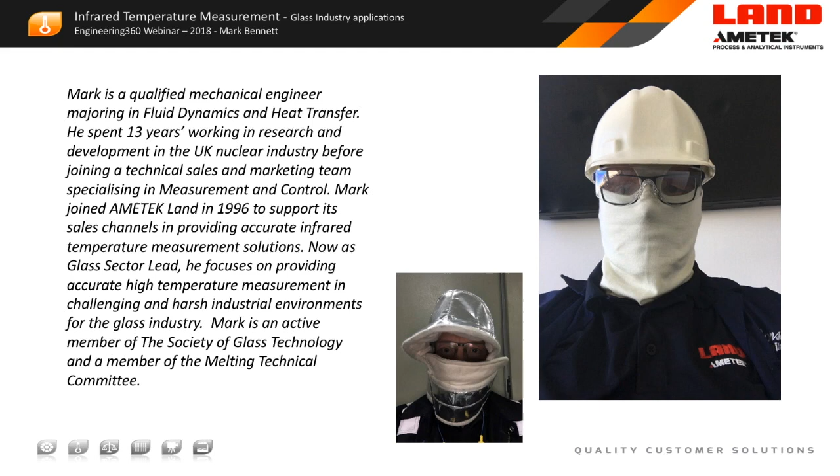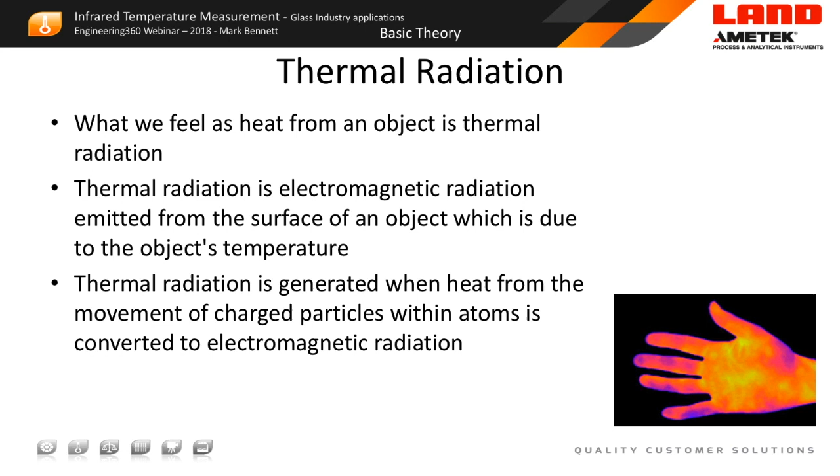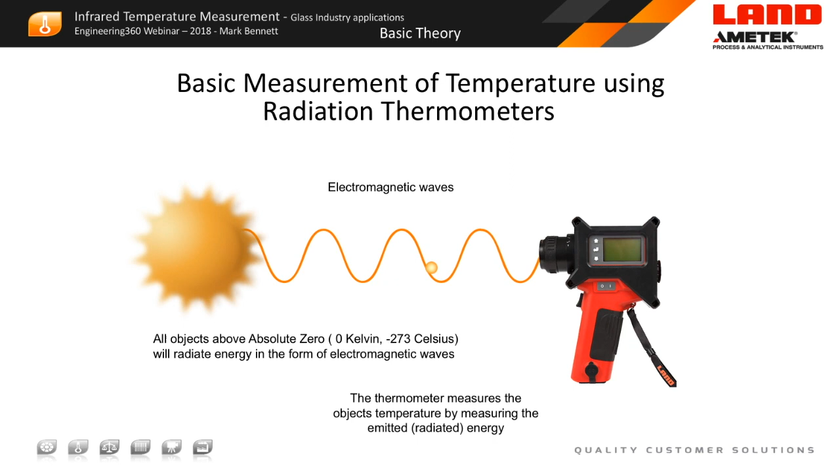Before we get to look at some of the applications in the glass industry, what I'd like to do is cover some of the basic theory and what we are looking to measure with thermal radiation. For some of you, this is a new subject, something you're not familiar with. But thermal radiation is something that we all are familiar with. It's something that we can feel. It's the radiation we feel coming from a radiator or from a hot fire. What we need to think about is that all objects, everything above absolute zero, is emitting electromagnetic energy waves that we can make use of if we capture them and relate that signal to an output.

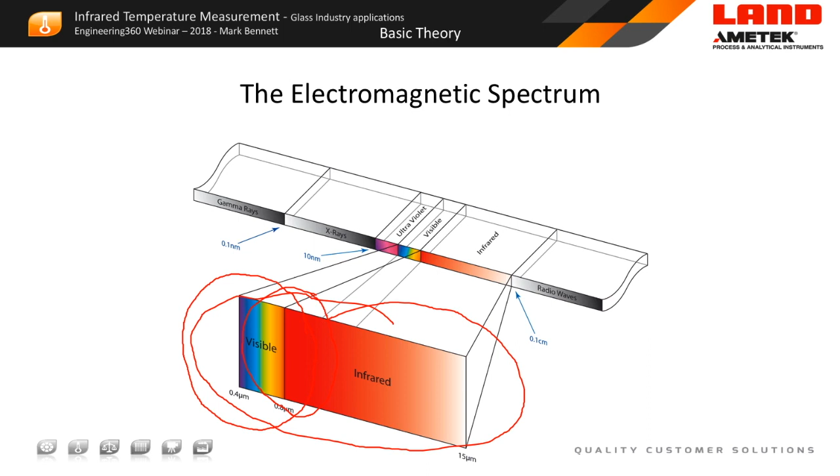When we look at the electromagnetic spectrum, it's something that we're all reasonably familiar with in our day-to-day lives, with X-rays, the visible light spectrum, and radio waves all covering the electromagnetic spectrum. The section I'm particularly interested in is the infrared section. What you notice is that the infrared section also covers the visible section, so our eyes are actually very good infrared detectors. If you think about looking at a piece of steel heating up, it changes from its natural colour to appear red to the eyes, because it starts emitting energy in the region our eyes see as red light. As the object gets hotter, it starts emitting orange, and eventually we call it white hot because it's emitting energy over all the wavelengths our eyes can see. Traditional incandescent light bulbs have a tungsten filament, which is heated until it is glowing white hot, and that's what our eyes see as visible light—it's emitting energy over the area that our eyes are sensitive to.

This actually shows us quite a great deal of how we use infrared thermometers out there in the field. We can use our eyes for making certain judgments, and we'll look at that later in the webinar. So the first thing to understand is, how do we measure infrared energy? How is that measured by a thermometer, by a device that gives us something we can relate to temperature?

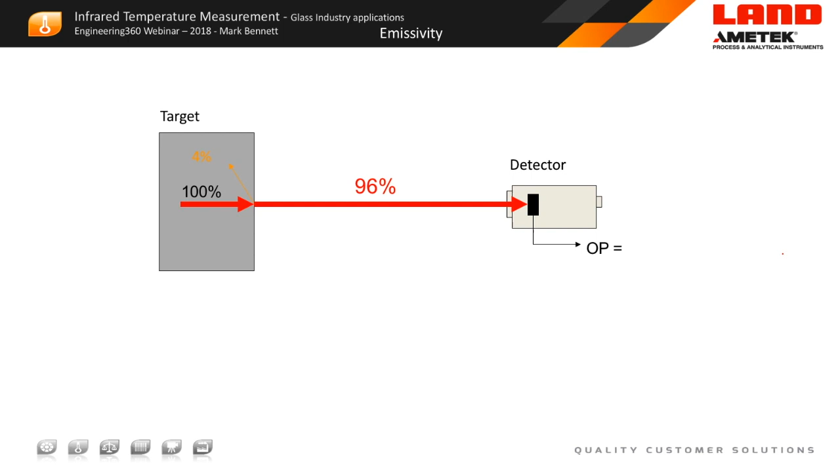If we are to relate that 96% of energy that our detector receives back to temperature, we need to calibrate the device somehow. The way we do that is to take the instrument to a calibration laboratory, which has a device called a black body furnace.

A black body emits total radiation - that's 100% of radiation over all temperatures at all wavelengths. That's quite critical, all temperatures and all wavelengths. What we do is relate the output from our detector to equal some function of temperature.

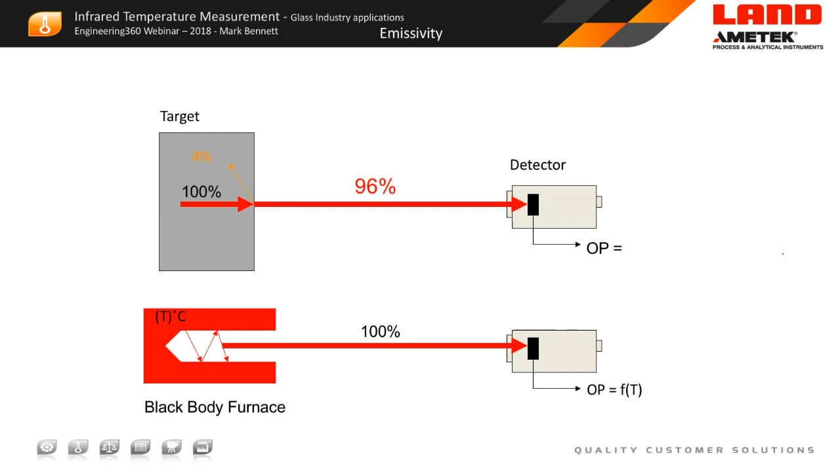What we need to recognize is that the emissivity value, which is a ratio value, is the radiation emitted by an object at temperature divided by the radiation emitted by a black body at the same temperature. This term, emissivity, is actually a factor which relates the real world back to our calibration laboratory.

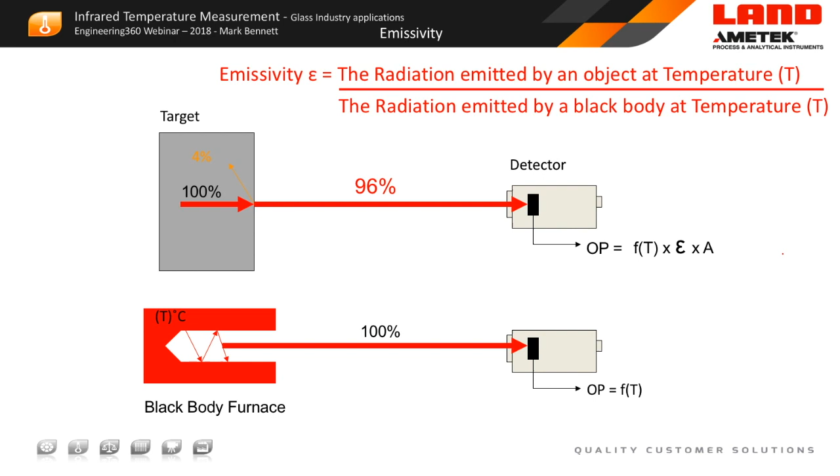The output from our detector then becomes equal to some function of temperature times this emissivity factor times the area over which the measurement is made. So if we look at that as an equation: output equals some function of temperature times emissivity times area.

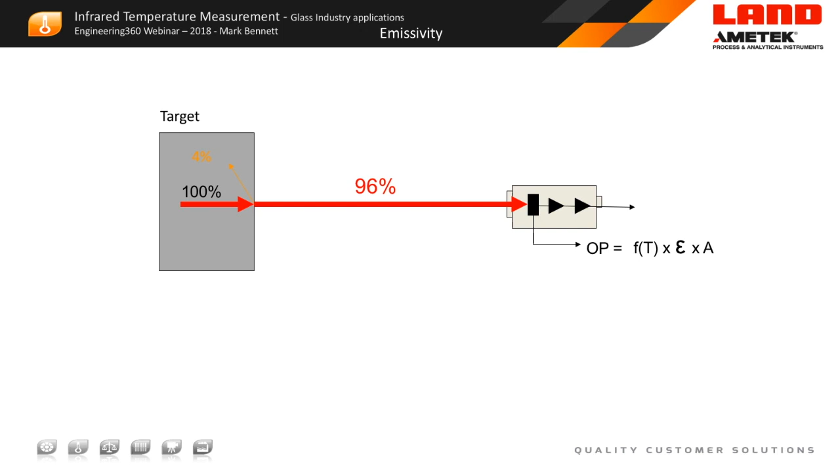Let's look at our example here where we have 96% of the energy coming to our detector. What we need to remember is our emissivity relationship, which we've calculated either from reference tables for emissivity, or from a known factor coming from evaluation, from history, or indeed Land can provide an analysis of emissivity for your specific material.

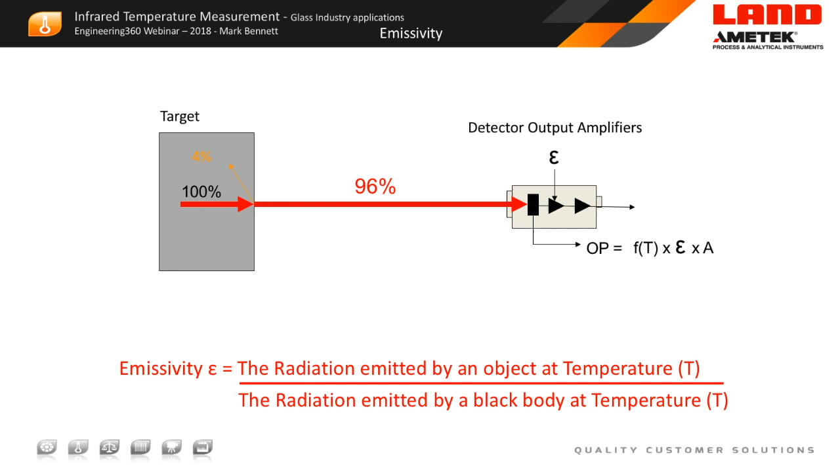What's important to recognize is that the emissivity is applied to the nonlinear detector output. What we do is divide that output by the factor of emissivity, which in this case is 0.96. So the example here uses an emissivity factor of 0.96.

That means the output from this amplifier is being effectively divided by this 0.96 factor, so we add artificially 4% of the signal. Then within the thermometer itself, we apply a linearizer, which gives us a 4 to 20 milliamp output from the thermometer.

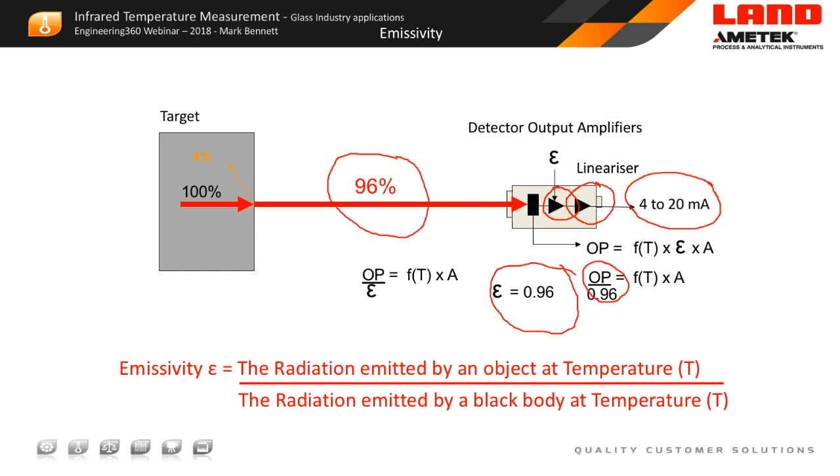So what are we here to look at today? We're looking at the glass sector. Glass is quite a phenomenal material - if you look around, glass is actually everywhere. It's in the vessels that we drink from, the windows we use to look out into the world, the windscreen of our cars, and even in the spectacles that we wear for seeing. Glass is a very, very important material.

Some of you might not realize, but the materials we use for strengthening are often fibre. The glass fibres we produce, high strength glass fibres, are used for example in strengthening the blades of windmills, and indeed in my own vehicle, the aluminium cylinder head block has reinforced glass fibre in it to give the block strength.

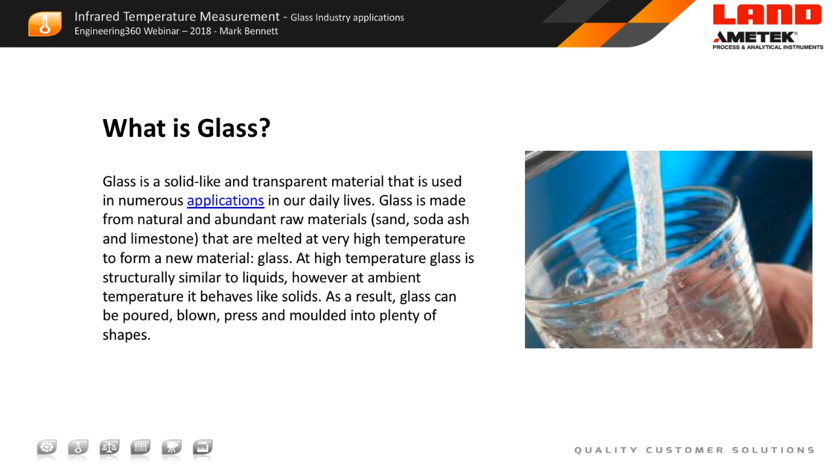So glass is almost everywhere, and it is the ultimate recyclable material because we can reheat, remelt, and reuse glass. In our current global concerns about the environment, glass is a very important material going forward. It's something we need to look at and improve the material science around, because we've been making glass pretty much the same way since Roman days. There's a lot of work to be done improving the production of glass and how we move that forward in terms of efficiency of production.

So what exactly is glass? Well, believe it or not, the basic form of glass is liquid sand.

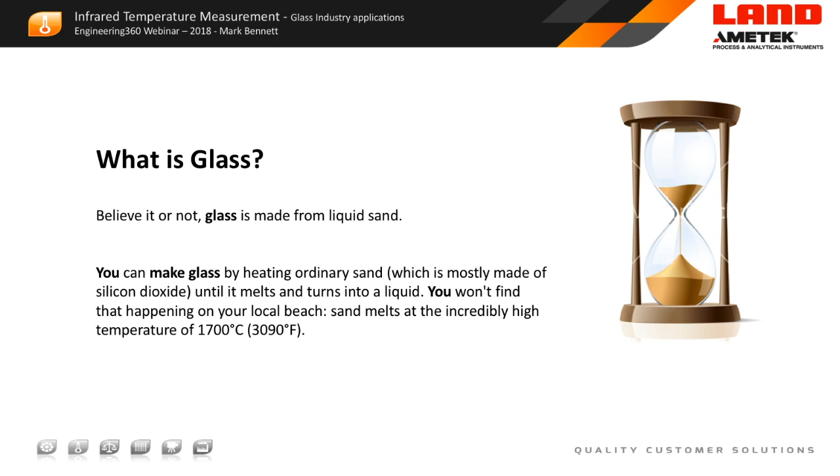So what we're doing is we're taking sand, which forms the vast majority of what's known as the batch. The batch is what's put into a big melting furnace, and we heat that up to temperatures of around 1700°C, 3090°F, and from that the batch forms or dissolves into what becomes molten or fluid glass.

There are many different compositions of this batch, the base raw material, that form lots of different glass types. There are some examples shown on the screen now, just from Wikipedia, but they give you a good understanding of the main glasses we would use.

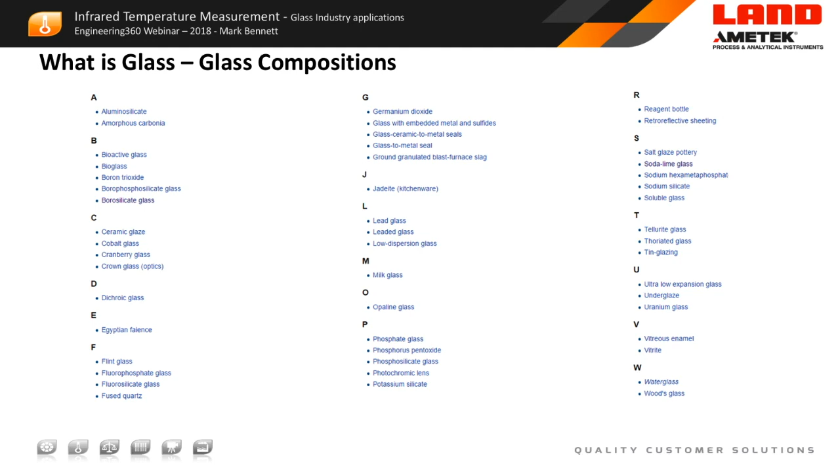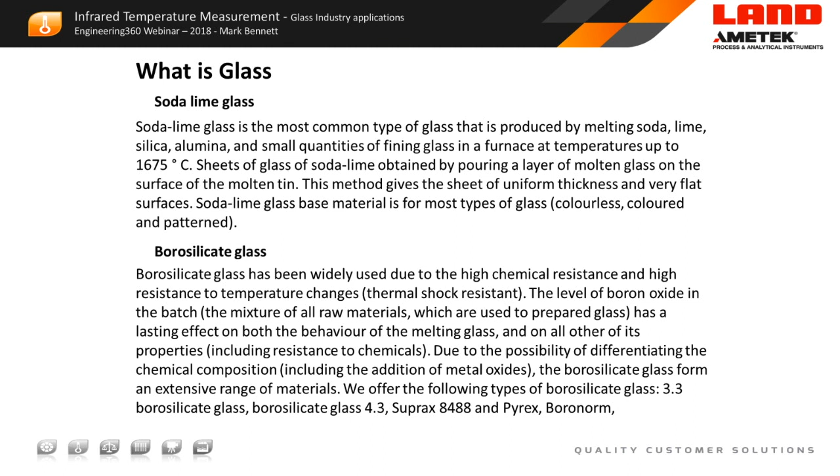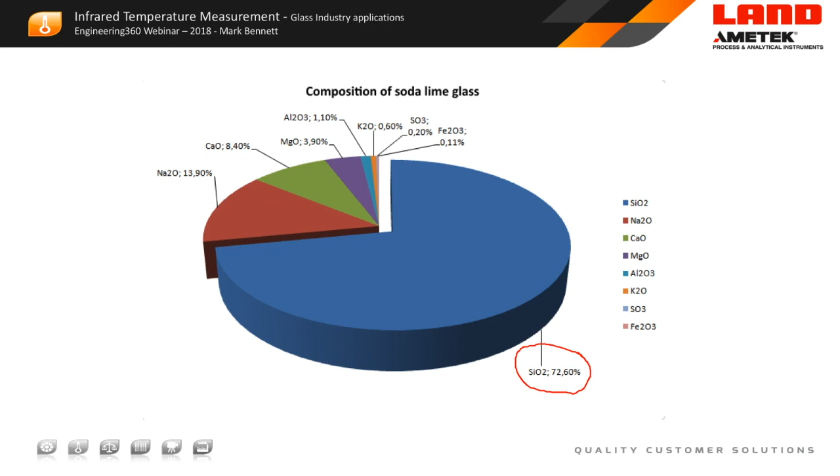Predominantly the biggest glass that we have in the system is soda lime glass, and then we also have borosilicate glasses, which are the higher chemical resistance glasses used. I've highlighted those two as examples. If we look at soda lime glass, predominantly the largest component is the sand, the silica. But there are a number of other component parts that make up the batch, some for forming specific types of glass, whether a different color, strength, or properties, and that's where the batch is made from.

There are also some additives which help with the melting, the dissolving of the glass, by forming a wetting process around the materials. It allows them to dissolve into the process more readily.

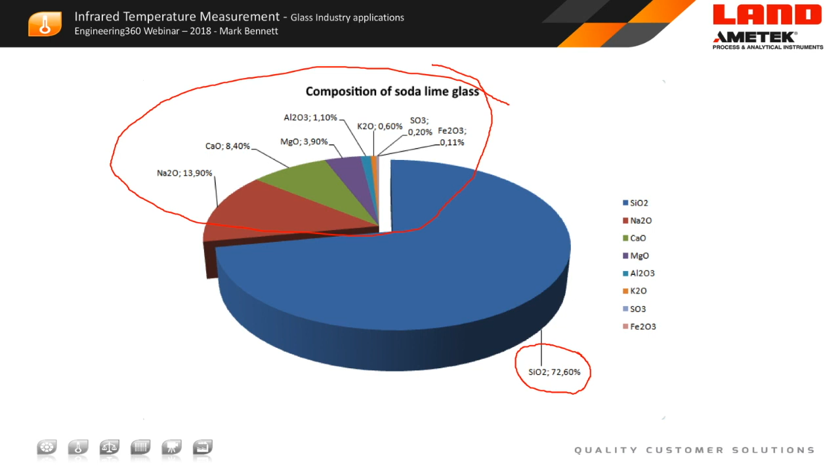So let's start the application part of this webinar, looking at the start of the process, which is the melting of the sand. The melting of the sand occurs in what is known as the glass tank, which is heated somewhere in the region of between probably 16 to 1700 degrees centigrade.

Every 20 minutes there is something called a reversal. During the reversal time, the flame is extinguished and the reversal of the flames occurs. We do that because the waste gas is taken into the regenerator, where energy is effectively stored, and thus can be brought back into the process without wasting the energy.

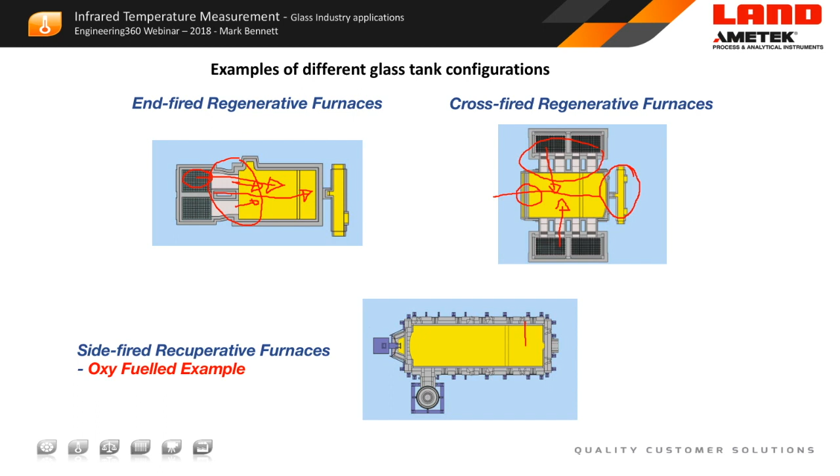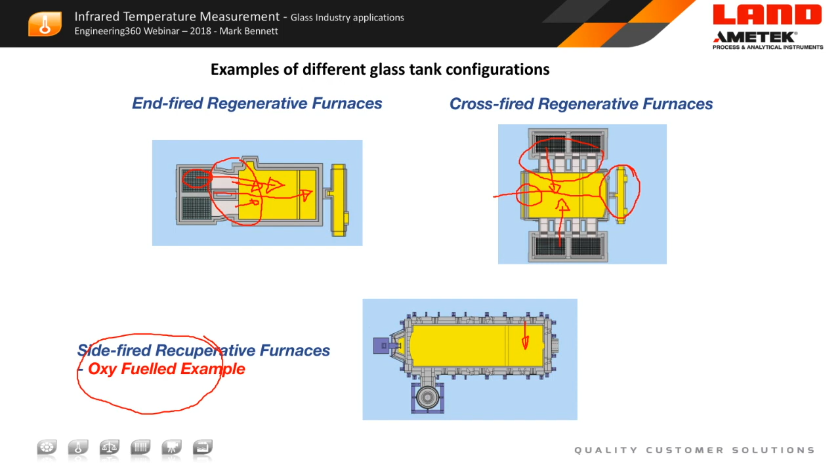The modern new design of tank is what's called a recuperative furnace. In this furnace, the flames run continuously, but they are what is known as oxy-fueled furnaces. With an oxy-fueled furnace, we burn the fuel using pure oxygen, and this reduces the NOx values within the exhaust gases, and again is a green solution for our planet.

To drive these thermosiphons under the surface, the primary goal is to create a temperature profile along the crown of the furnace and along the side walls of the furnace. The key element here is to create what's called the hot spot, which occurs above the spring zone.

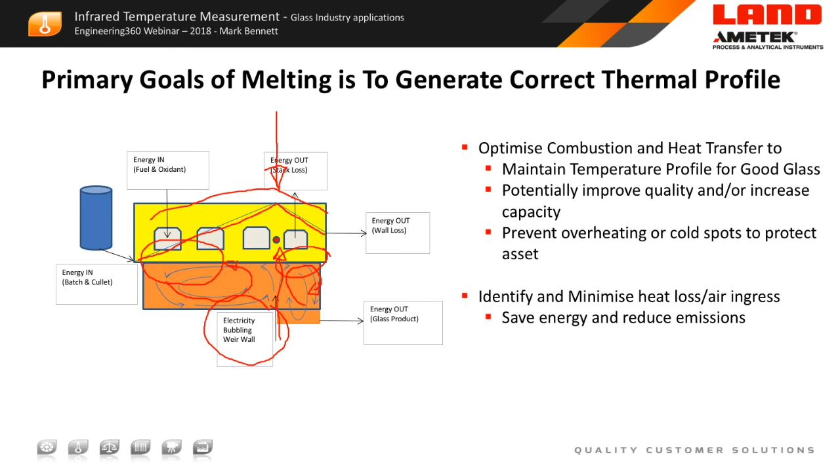As you can well imagine, temperature control, temperature monitoring, and flame management are very important within this environment. Traditionally, and if you go to most glass plants everywhere in the world, the Cyclops Portable has become the industry standard for monitoring temperatures and temperature stability within a glass tank.

You'll find that almost every glass company in the world shoots a single point using the Cyclops 100L, the 2F version, which has integral eye filters designed for use in very hot environments, particularly in glass tanks, because if you look into a glass tank without protection, you will damage your eyes. The Cyclops allows us to take an accurate temperature measurement from a reasonable distance at a very precise location. This has through-the-lens optics, very similar to a camera. In fact, the original lens on the front of this device was designed by the Minolta camera company, to give you an idea of the quality of optics and why this instrument is used as standard.

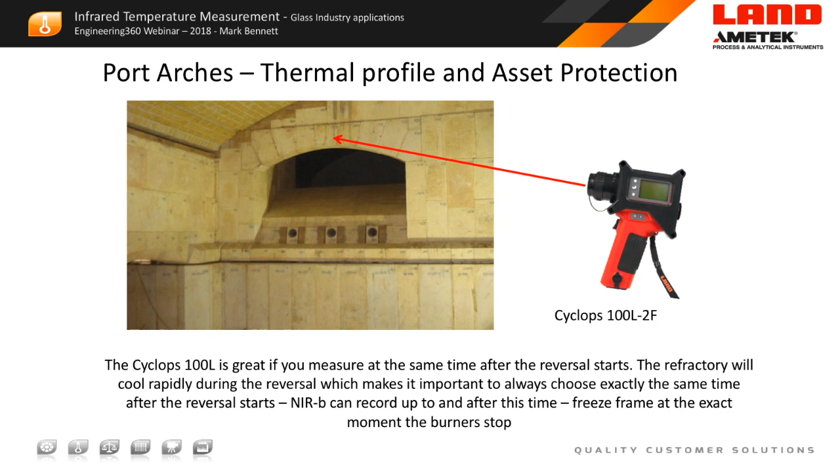So once a shift, at least, a single point measurement will be made to check the overall temperature and compare it with the glass tank on a trending basis. This is to compare with the blind thermocouples mounted in the crown and along the breast walls of the tank. Of course, blind thermocouples are not measuring true temperatures. So the Cyclops is used to make a measurement during the reversal cycle at a precise point when the flames are out for a given length of time.

Now, what you can imagine is that making a temperature measurement with a Cyclops takes time. The optical profile, as we've discussed in the previous slide, is monitored by taking several point measurements along the walls of the tank to look at the shape of the optical profile. To take an optical profile using a Cyclops unit can take several hours.

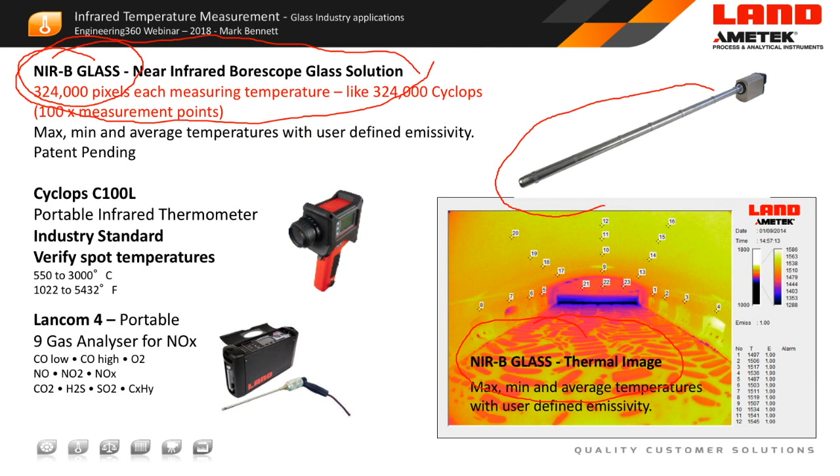However, what you can see here is the NIRB glass true thermal imager for monitoring temperatures within the glass tank. This is a thermal imaging device which looks along a lens system such that the actual thermometer, the detector, the important part, can be stabilized outside the glass tank to give accurate and stable measurements continuously inside. As you can see here, you can actually measure at any location continuously, either along the walls or anywhere on the refractory. This allows you to capture very precisely the temperature in the tank at a given time during the flame-out, between the reversal when the flame is not present.

We still use the trusted Cyclops as a cross-check, because the operators looking inside the glass tank and making these measurements is a very important part of the general process, just to monitor the condition of the glass tank. So we're complementing the use of the Cyclops with these new continuous temperature monitoring devices, which give us 324,000 pixels. Each of those measurement points is replicating what you see with the Cyclops portable.

The important thing to recognize is the reason the Cyclops works so well is that the filters in the Cyclops filter out the combustion gas from the measurement. There is no effect from the combustion gas on your measurement. It also measures from a very, very small area. The Land thermal camera measures at the same wavelength precisely, using the same filters as the Cyclops. So everything you're measuring with the Cyclops is directly transferable and relates to the thermal camera data. That's very important because we all have, in the industry, many years of operating glass tanks and many years of data, and that historical data allows you to continue managing and developing your process.

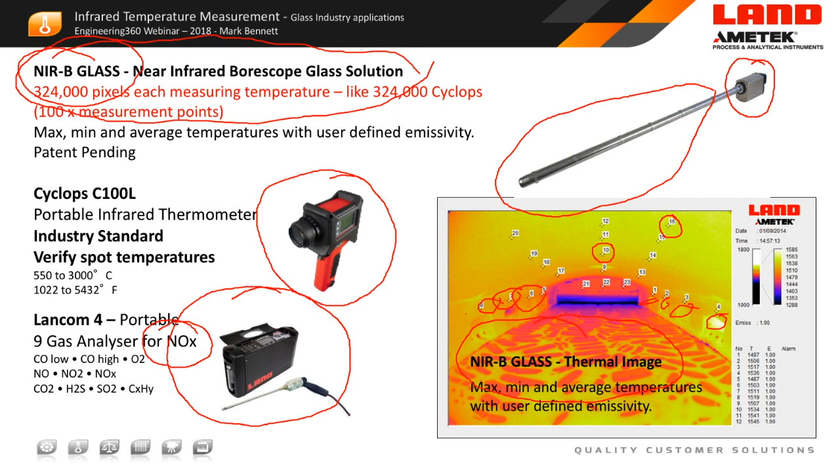So, NOx being the important gas we're trying to monitor, this analyzer allows us to take measurements in what's called the port necks. We can use a portable device with an extended ceramic tube to make spot checks of the various gas compositions in each of these locations from the back of the regenerators.

So if we look at this as a tool, let's look at this new technology that's coming to the market. We've been making these infrared cameras now for maybe 5-6 years. There are about 50 to 60 installed continuously monitoring inside glass tanks. What we can see here is the power of online temperature monitoring. You are seeing what is a recording, an actual recording taken inside the furnace with the NIRB camera, and it's showing you continuously the optical profile.

Within that profile, it's displaying the maximum temperature along the line, the minimum temperature along the line, and also the point at which the cursor is located. The cursor is displayed by a little red cross on the display, showing you exactly where the highest temperature along that line is being monitored.

That's quite important because it not only gives you the hotspot, but it also shows you the shape, the energy distribution within the glass tank. So this allows you to do a great deal of work in terms of optimizing the fuel going into the tank.

Now, because you're measuring the whole area, you can also look within the tank if there are any areas getting too hot, and particularly any areas getting cold with air ingress, which wastes energy - a total waste of energy if you have an air leak into the furnace. And if you have an air leak, you get condensates, and the condensates will destroy the refractory. So asset protection using this device is a very important part of what we're giving as part of the solution.

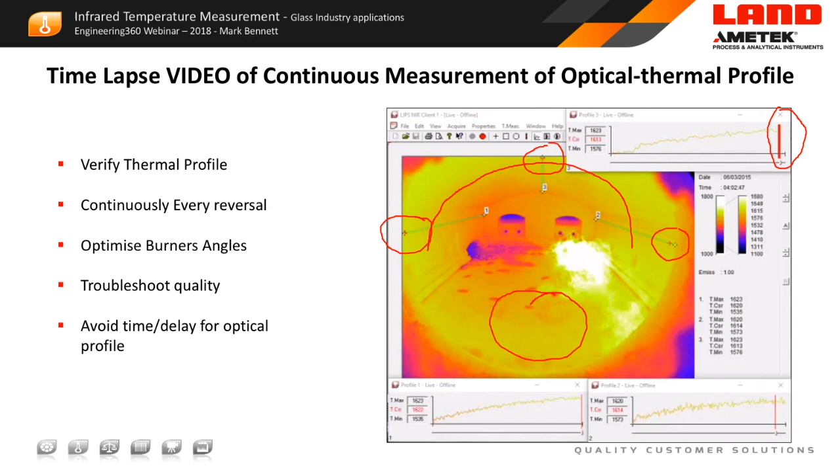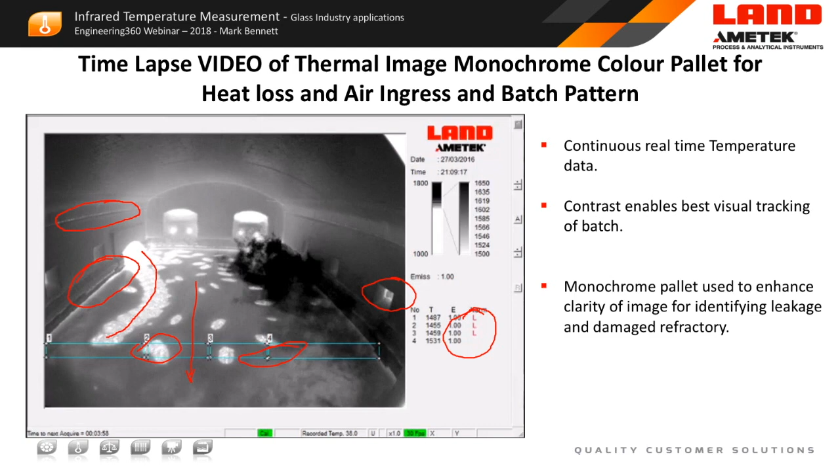And repairs are very expensive. So being able to monitor, prevent, and when you find a repair, quantify it, is obviously very important.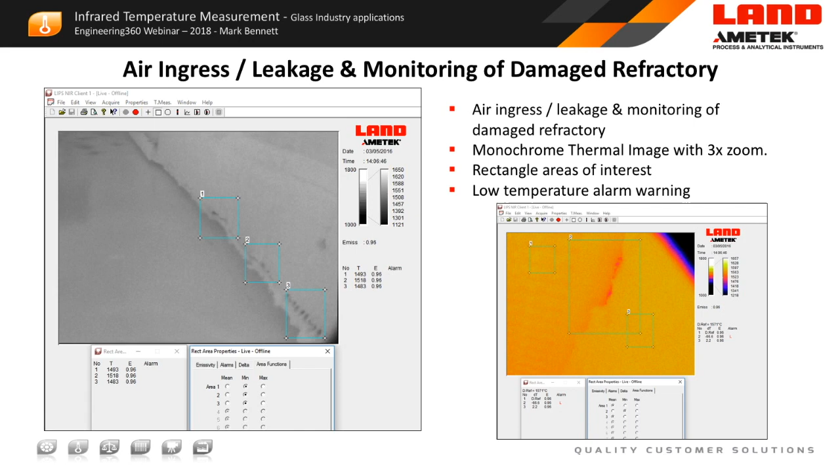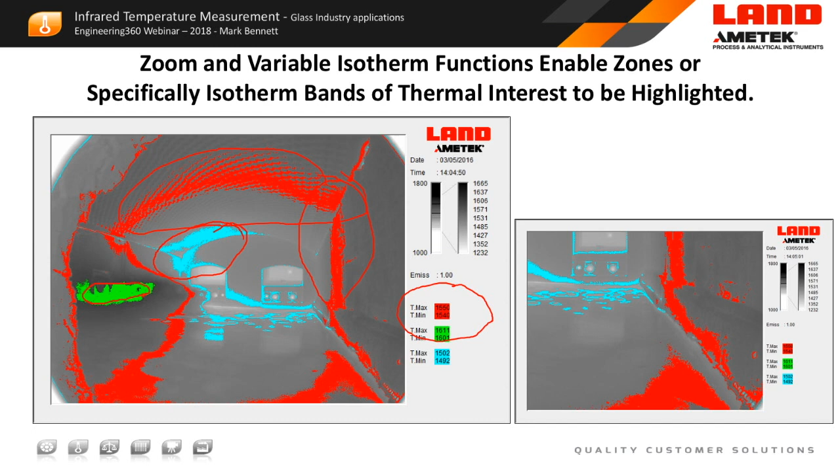And finally, within this image, we've got something showing the basic flame shape. So we can see how the energy is being formed, where the energy is being formed, and how that is being impacted - how it affects the overall furnace.

And then finally, what I want to look at here is the flame shape, because with the camera we can use an integrator, and we see very clearly where the highest temperatures within the flame are being formed. This allows us to use the thermal camera for evaluating the flames that are likely causing the most NOx within a furnace, and this is a huge step forward.

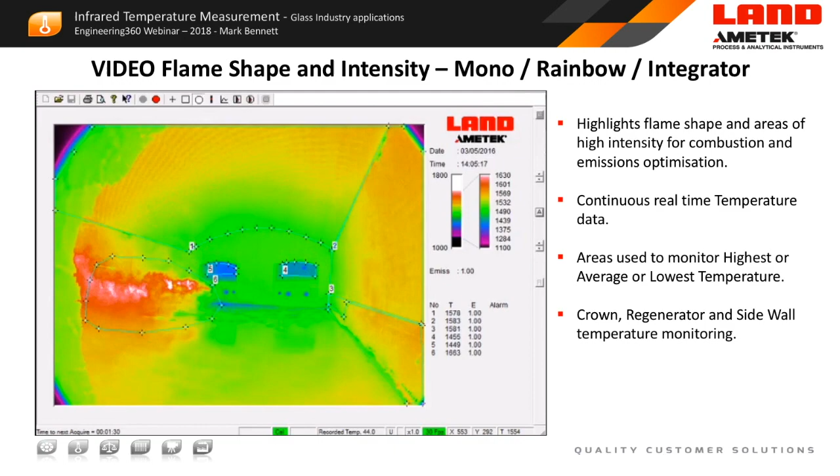This is the data, this is the work, this is the research that we're presenting currently at Glass Problems and various conferences around the world, because this really is groundbreaking technology that the glass industry can use to optimize the process.

As a result, AMETEK Land were the winners of the Glass Focus Award in 2017 for an innovative solution where we applied this technology in collaboration with Simpson Combustion and Encirc. Many of you will know Encirc has some of the largest container producing plants in the world, so it was a real challenge to optimize the furnace, and we do have case studies giving details of that process.

You're welcome to download those from our website. So in summary, if we look at the applications in the glass tank, what we have is the Cyclops for measuring

the crown temperatures, or the port arch temperature as it's called, or indeed the regenerator temperature. Now these are all single point measurements, so this is a spot measurement. The operator goes out, takes a measurement, and retires back to the control room. The NIR-B camera, however, gives us exactly the same data, 300,000 measurement points. It's very similar to the Cyclops, in fact directly comparable with the Cyclops, continuously, and not only continuously, but recorded for comparison as the recipes change, looking from melt to melt.

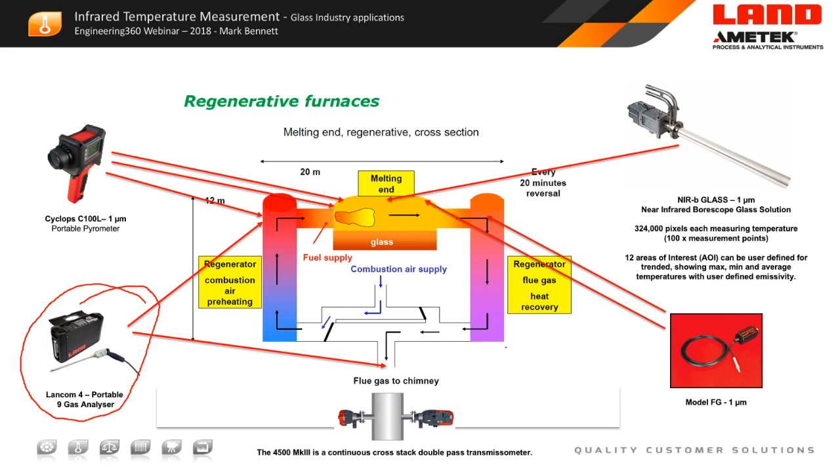We then complement that with a portable gas analyzer, and also the flue gas analysis, the chimney analysis, the stack analysis, which is the continuous cross-stack opacity meter. This cross-stack opacity meter meets all the US legislation. It's designed to be highly accurate, highly stable, and gives good feedback for maintaining legislative control of emissions from the stack.

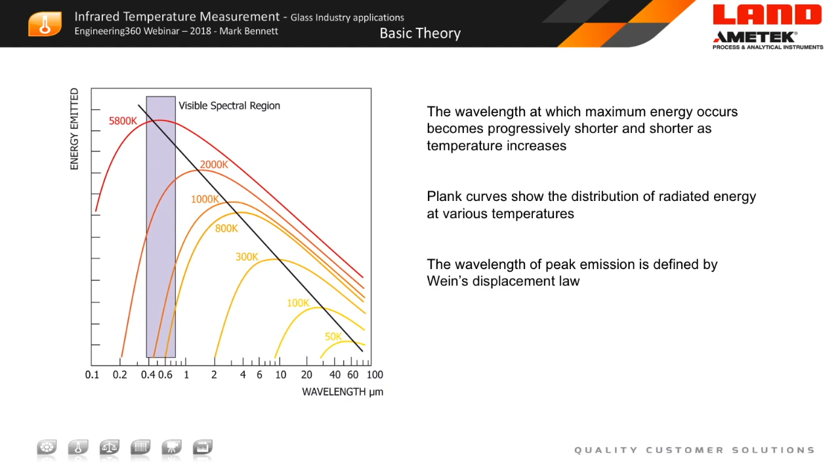So, coming back to our old friend Max Planck and looking at the Planck law and the curves I've shown you, one thing I'd like to show you about the glass industry particularly is that we do have some specific challenges. The main challenge is that when you look at soda lime glass, depending on the wavelength of operation, so depending on which particular thermometer you choose, you will see different amounts into the glass surface. The reason we use glass in the first place, in most cases, is because we can see through it.

So if our eyes, operating between 0.6 and 0.7 microns, can see through the glass, our infrared thermometer working at 1 micron will see through the surface. Now, on molten glass, on clear glass, we see up to about 100 millimeters into the surface of the glass. The energy is collected within that glass. It's a little bit like looking into mist or fog. Your eyes can only see a short way and can only define something within the mist over a short distance, but actually you can see further and further, though your eyes lose clarity.

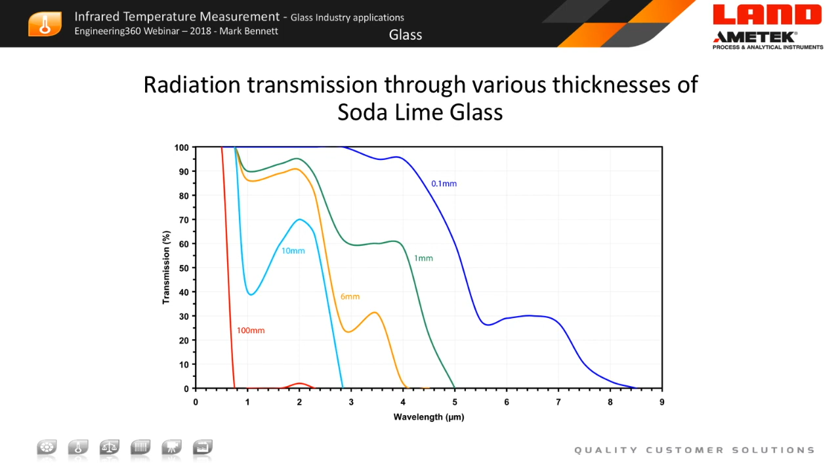And it's the same with the infrared thermometer. Most of the energy is coming from just below the surface and into the surface, but it will see through something that is maybe only 40 millimeters thick. So that becomes quite important on some applications, and you'll see why, as we go through the presentation and look at different ways of measuring glass itself, why this is important.

If you look at the range of temperature thermometer devices that AMETEK Land produce, this set of curves gives us a good understanding of why we make thermometers that work at 1 micrometer, 1.6, 2.4, and this critical 5 micron, and the longer wavelength, 8 to 14.

The reason for this is that if you look at the transmission of the glass, what we find is that the glass will transmit energy down to a point where it becomes opaque at the 5 micron region. So what we tend to do is, if we're looking for molten glass measurement, where we have a reasonable bulk of glass, we will always use a 1 micron thermometer.

So the Cyclops is 1 micron, the model FG, which is an industry standard, a legend product, is working at 1 micron, and the NIR borescope is also working at 1 micron. So this is our critical measurement here, which is used for molten glass measurements, and we get a good reading for what is process control.

Now, in some applications where you might have, for example, in the fiberglass industry, you have a small, narrow stream of glass that's being formed. In those cases, we sometimes use slightly longer wavelengths so that we don't quite see through the glass, to give us an accurate reading.

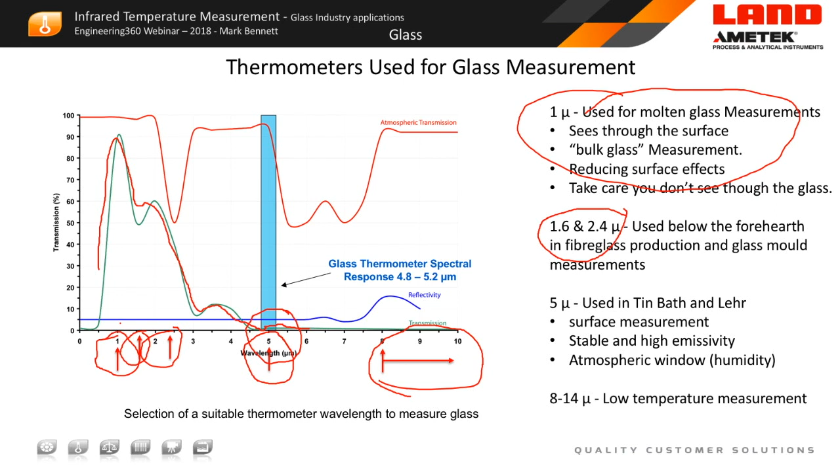Just to recap slightly, one of the things we need to take into consideration is the emissivity factor. Many of you will have understood, maybe know a little bit about emissivity. We've explained how that correction factor is applied, but what you might not realise is it is a surface effect.

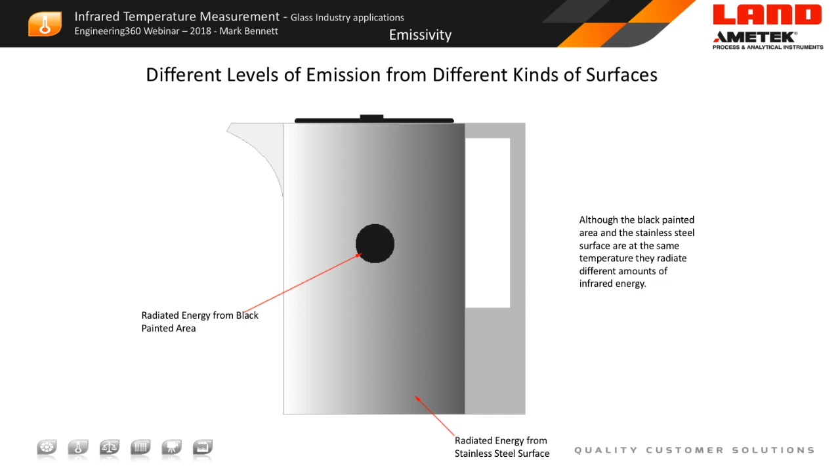So if you take a stainless steel kettle in this case, and you simply paint the surface, you'll get very different levels of radiation emitted from the black circle compared to the shiny stainless steel circle. And we see this all the time in industry. This is a comparison between what is the glass mould, which is very shiny, highly reflective, and our eyes can see that, compared to perhaps what is raw batch, which is very matte finish, very broken.

What the eye tells us in this situation is that this is a very high emitter, a diffused emitter. In this case, it's a specular, low emissivity emitter. So what we have to think about is these different values that we might need for emissivity.

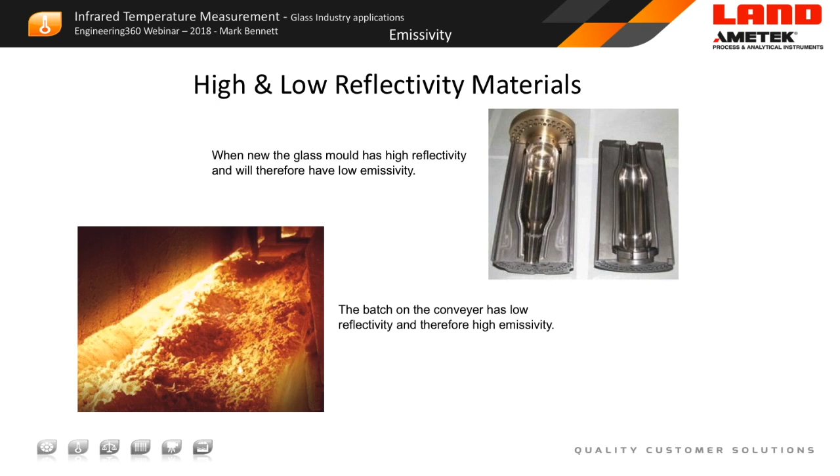We've already said that to determine emissivity, what you need to do is look at the manuals. There are a lot of reference manuals which will give you different emissivities for different materials. But what's important to recognise is that the surface condition, if the surface deteriorates, if the wavelength that you are measuring at changes, is very critical. Remember, the Cyclops, the NIRB, and the FG all measure at precisely the same wavelength, so the same emissivity applies. Viewing angle also has an effect.

Now this is more on the shiny glass mould, for example, where you've got a specular reflector. If you look at a normal, for instance, the painted walls of your office, they are a diffused reflector. So the angle effect becomes less significant when you're looking at something that's a diffused reflector. Temperature can also have an effect.

So when we're looking at emissivity, one of the critical things, and one of the things that I often say in my presentations, is please set the emissivity and then do not adjust it. Because if you set the emissivity for your process and you do not adjust it, the data, the historical data, all becomes valid. So providing you're having the thermometer calibrated at a regular interval, maybe every 12 months, then you will have good quality, traceable, reliable data that you can use not just within the plant historically, but from one plant to another around the world.

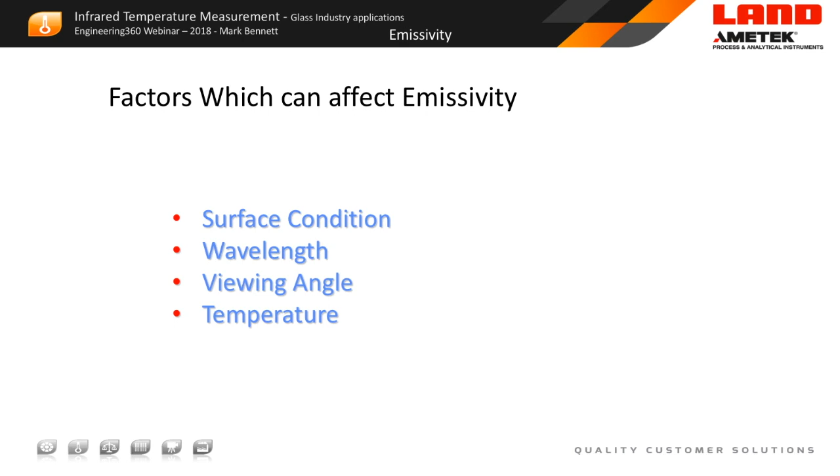Now, if we look for a minute at the thermometer optical system, what we're looking at here is the area term that I referred to earlier. If we look here, this thermometer has a field of view focused down to measure within this area. It's important that when you're taking a temperature measurement, you completely fill the field of view. Maybe obvious if you think about it, and that is that if you don't fill the field of view, you don't get all the energy.

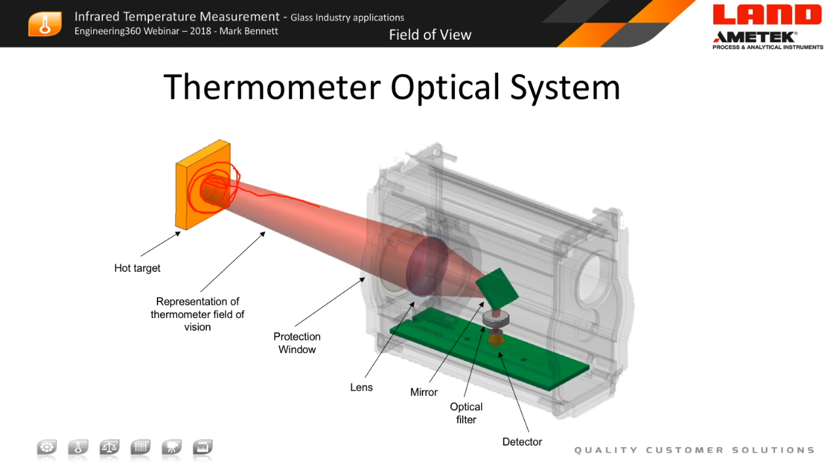So if you look at a small target, you will only receive from that target a limited amount of energy. You will not get an accurate reading. So what we would look at doing is making sure that the object we are measuring completely fills the area. A small target in that area will not be measured.

Now, some of you will know about two-coloured thermometers or ratio thermometers, and I give a riveting lecture on the use of these thermometers. But it's suffice to say that in 90% of applications, certainly within the glass industry, the standard single wavelength thermometer is by far the best choice.

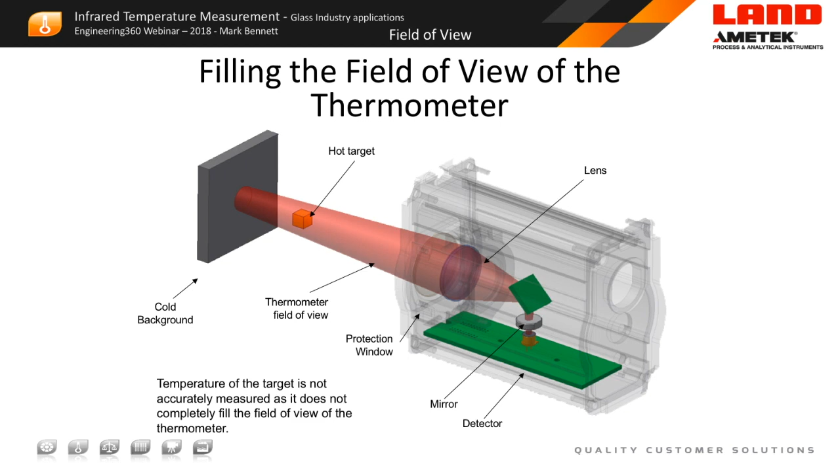The reason we all use the Cyclops is it has very accurate focusing down to a specific point. Focusing becomes very important with an infrared thermometer, because if you're focused at a point thinking you've got the right diameter, the field of view may have opened up past the focus point. Many thermometers out there don't measure from the location they say they're measuring from. The Cyclops is precise, and that's the reason we use it.

You can measure through a peephole onto the far side of the furnace with accuracy and repeatability.

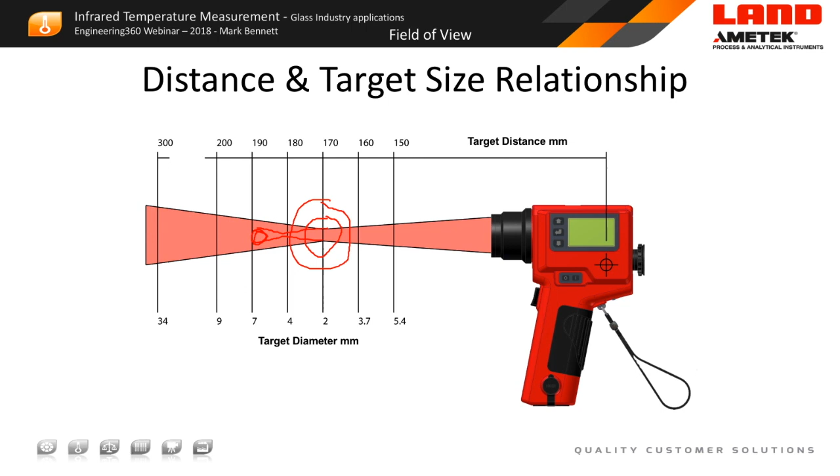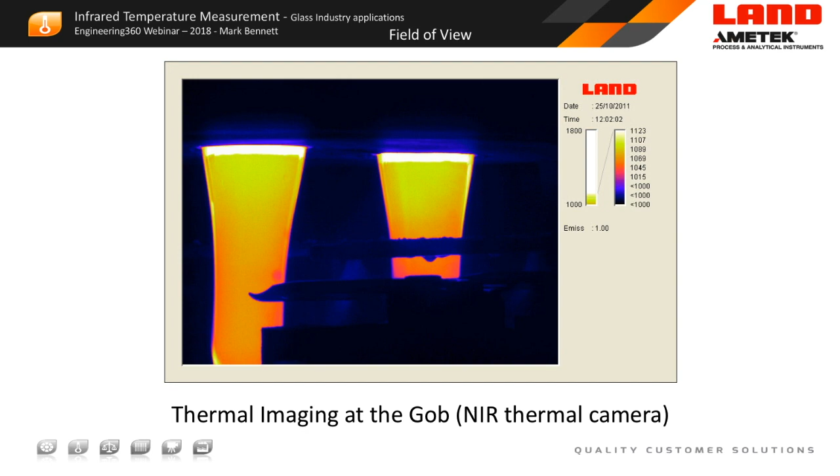When we look at glass gob measurement, this is a thermal image taken of a glass gob using a 1 micron thermal camera. We're looking through the surface, and you can see certain effects, certain non-uniformity of the glass. The reason for showing this is that with a large gob of this size, we get good, reliable, repeatable measurements looking perpendicular onto the gob itself.

But when measuring smaller gobs, and certainly below the forehearth, it's always recommended that you measure up, looking into the neck of the forehearth. This increases the path the Cyclops is looking at within the glass gob, and particularly with very small gobs, we would look up into the mouth of the forehearth itself to give a good, reliable reading.

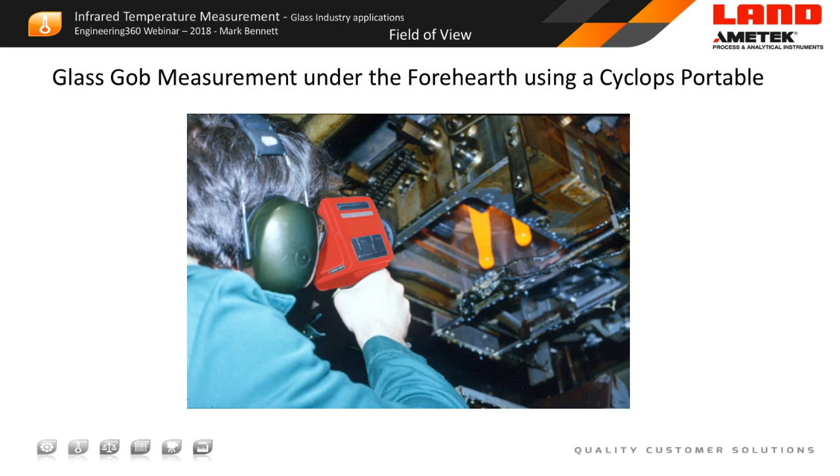There is always a solution where we can migrate from a portable system onto a fixed system, which gives more reliability of the reading, because you take away the variations you get from operator to operator. We have a number of successful installations around the world continuously monitoring and tracking gob temperature.

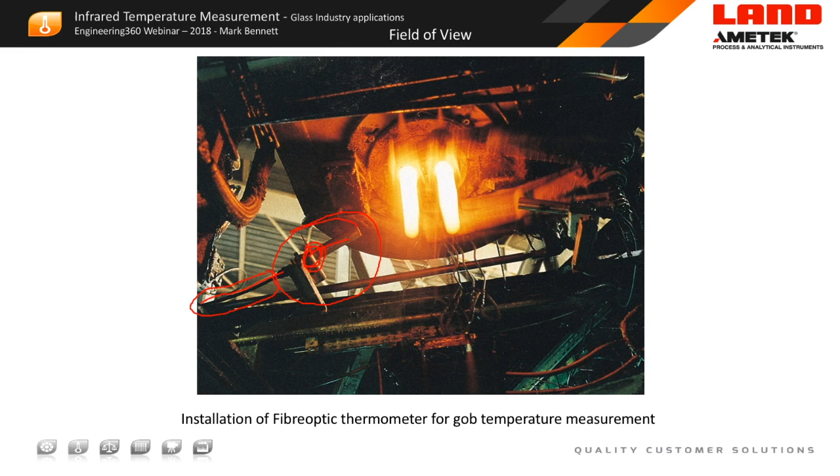Moving on to the float production process, now that we've looked at molten glass applications. I want to look at the tin bath application and the annealing lehr. There are great books written about the glass production process, but I'll keep it simple. We melt the glass in this region, refine it here, then the glass is pulled onto the tin bath. As its name suggests, the glass floats on top of liquid tin.

At this point it's very important that you don't measure through the glass, you only measure the glass surface, otherwise you would measure the temperature of the tin. Fairly obvious, really. So here we need to be using our 5 micrometer thermometer, to only measure glass surface. Land Instruments, AMETEK Land, have a range of thermometers for this application to give accurate, reliable readings.

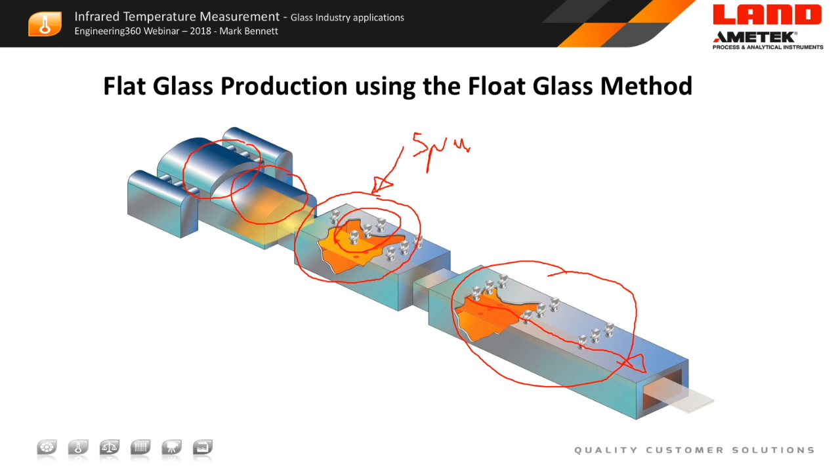When we come out of the tin bath, we go into the annealing lehr. As the glass flows down this annealing lehr, the stages of cooling are absolutely critical, where we would look at going from a single point device, looking at perhaps just the center line, or even multiple measurements onto the scanning devices.

The beauty and reliability of the scanner comes from having a single stabilized detector and a rotating mirror, so the same detector is measuring at each point, giving relative temperature measurement of very high repeatability and stability. Within the scanner, we actually measure 1,000 measurement points over an 80-degree scan, building up a very comprehensive thermal map of the process.

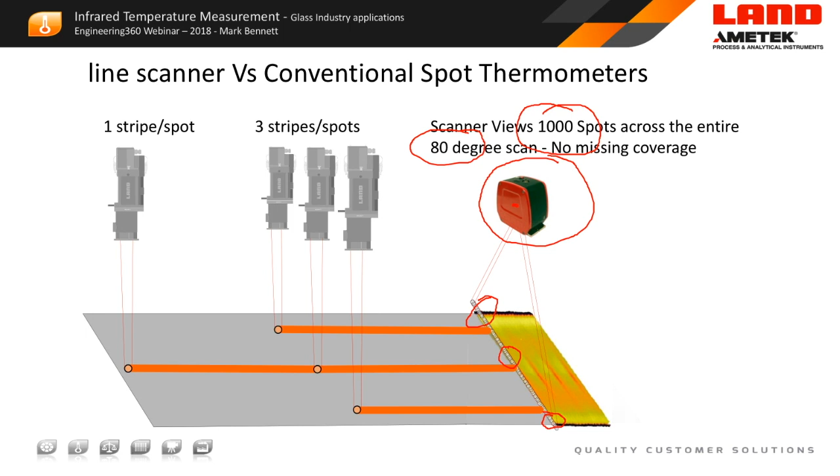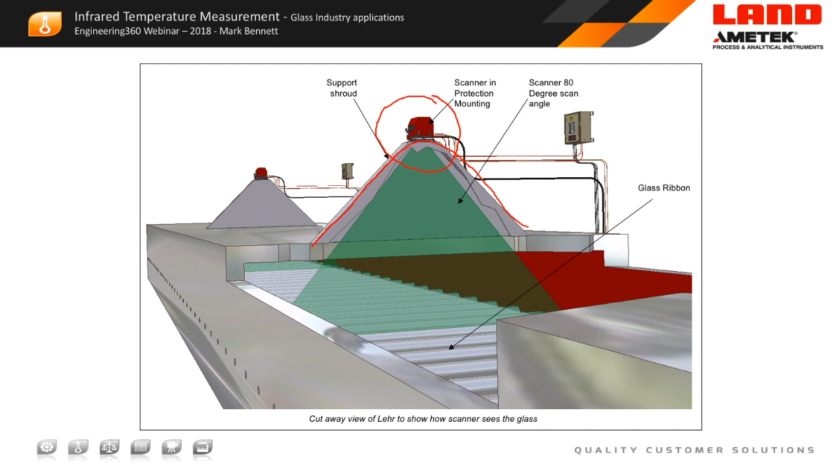Land has a full glass lehr solution. We've put together our knowledge over the years to produce a rugged housing suitable for mounting on top of the glass lehr with a sighting cone, which seals the gases and gives us access to measuring across the full width of the glass. From that, we use software to produce thermal maps and temperature profiles across the glass. These are critical measurements, critical parameters for any manufacturer of float glass.

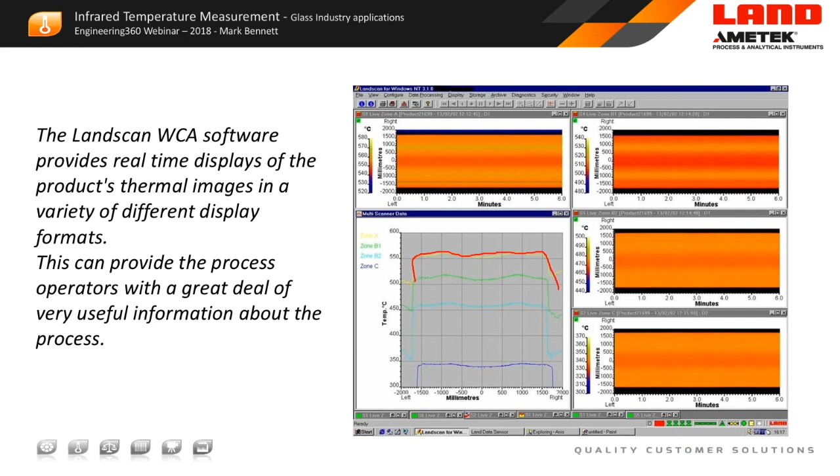If we look at the production of windows, float glass, in the modern architectural theme, we are looking at many buildings being made which are then covered with glass. Now, the standard glass, as it comes from the float line, has not been tempered, it's not been stress relieved. And if you remember the old vehicles, the old cars, we used to have windscreens which shattered into shards and were very dangerous.

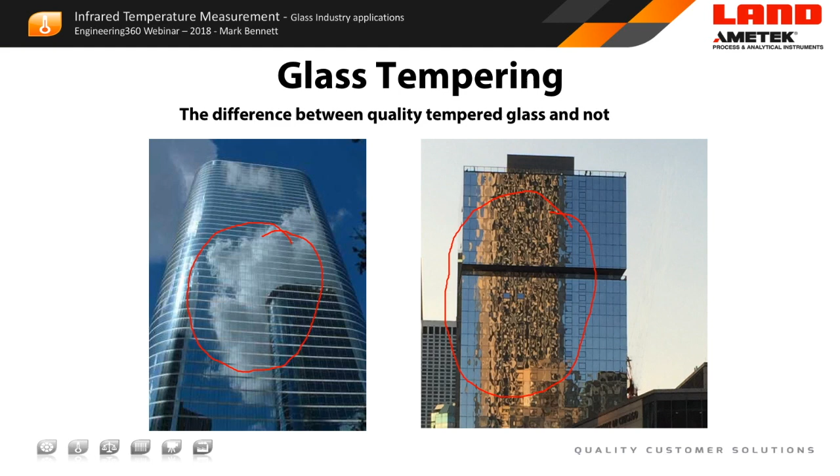The modern windscreens are all tempered, they break into small fine particles. But one of the main reasons for tempering is, as you can see here very clearly on this image, the reflection. Our eyes are very sensitive to what is the reflected energy coming from the building. And if you see something that looks misaligned, then that glass has not been tempered. Even if you see one pane among the whole facade of a building, your eye will be drawn to that pane. What we're looking for is nice flat surfaces so that we get this lovely beautiful reflection of our skyline, and that's using the glass tempering process.

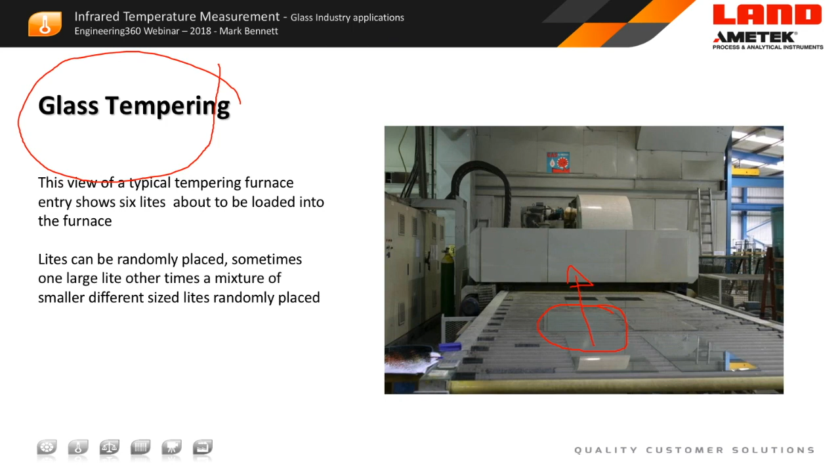And the way that the tempering process works is that sheets or lites of glass are put through a heating furnace where they're heated to a precise temperature and then cooled in a controlled way. Only by performing this process do we get the quality of glass that we're looking for in our buildings.

Now, some of you will have heard of low emissivity glass, or low E glass, or low energy glass. This is glass which is coated or covered so that some of the energy is retained and sunlight is reflected, so it's low energy glass. In this application, what we find is that the emissivity of the glass surface has dropped down to values as low as 0.3 or even 0.1.

So we have to add artificially a huge amount of signal to give us an accurate temperature reading. Furthermore, this emissivity value can vary from batch to batch as it's passed through the furnace with different processes. So what AMETEK Land have is a solution where we automatically compensate for the emissivity changes. We use single point thermometers to measure the underside of the glass, and we correct the emissivity on the fly in the scanner that's measuring the top surface, giving us an accurate, reliable, repeatable temperature reading.

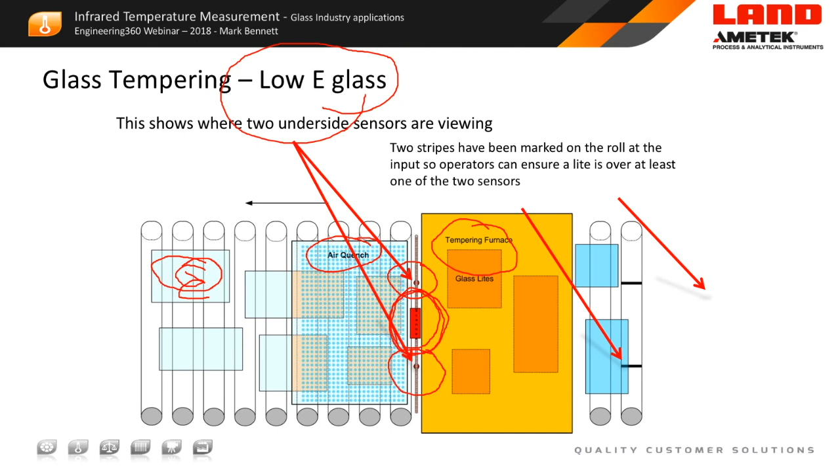Now what you can see here is there's a very small gap normally between the tempering furnace and the air quench. And because it's a small gap, you need a thermometer solution with precision optics. It's the precision optics that gives the Land its class-leading performance. It's the stability of the electronics and amplifiers that allow us to have the gain and stability to compensate for these low emissivity, low E glasses in this application.

And again, we present the data to an operator in a way that gives a very clear visualization of quite a complex thermal map. You can see here very quickly, everything that's green is within tolerance. The red areas are over temperature and the blue are under temperature. So an operator gets immediate feedback and can take action.

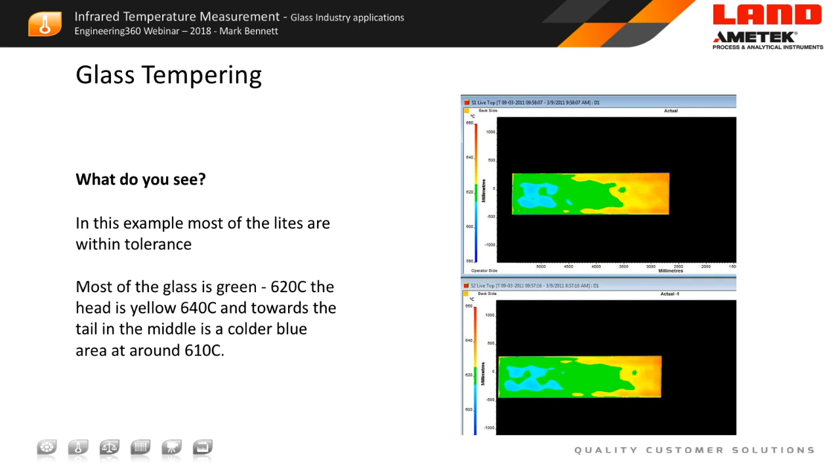And finally, when we get to the low temperature applications, we must move to the 8 to 14 micron region. These are general purpose measurements, the devices that we all have, the small handhelds that are low cost and low accuracy. What we can do is, again, by stabilizing the detector, by stabilizing the electronics, we can get accurate readings.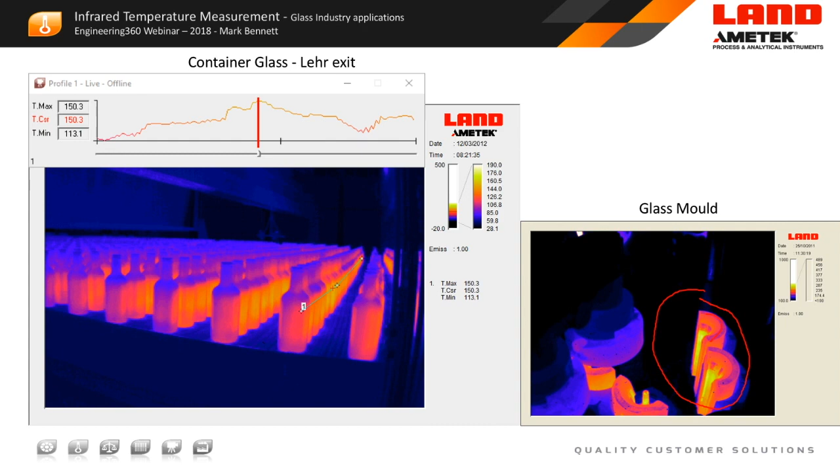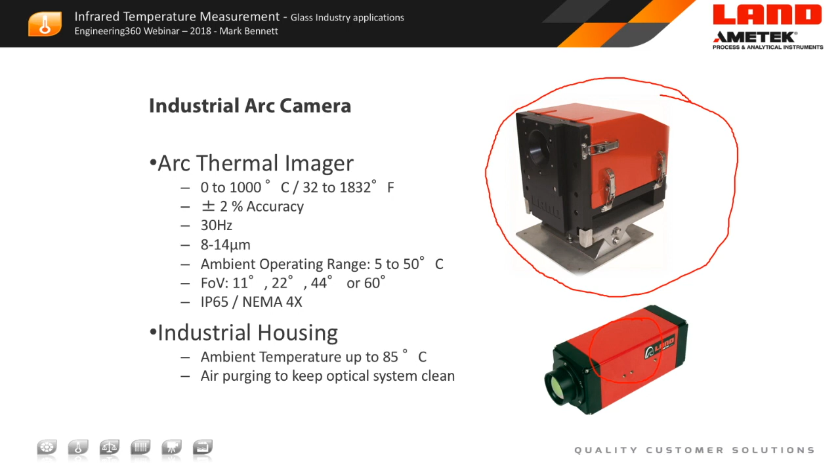How is the technology applied to measurements in the forehearth, and does color affect the measurement? That's a very good question. Indeed, AMETEK Land offers the Model FG, the forehearth glass thermometer, which is a bulk glass measurement, a 1 micron measurement, which is specifically designed for use in the forehearth and the distributors and feeders.

Infrared thermometers are used in this application simply because there's no disturbance, no contact with the glass, so there's no possibility of disrupting the flow along the forehearth. They give very quick response to changes in process conditions for control purposes, and no drift, unlike thermocouples, which of course will drift with time.

Thermocouples are fairly slow responding, and one of their limitations is that as the glass depth changes in the forehearth, it does affect the reading of the thermocouple.

The FG thermometer is quite remarkable, really. It was designed in 1984, so it's been on sale now for more than 30 years. It's a legend product. Many of you will remember it as the FiberTemp or FiberTemp 2 before it became the Model FG, and it's used extensively simply because of its reliability.